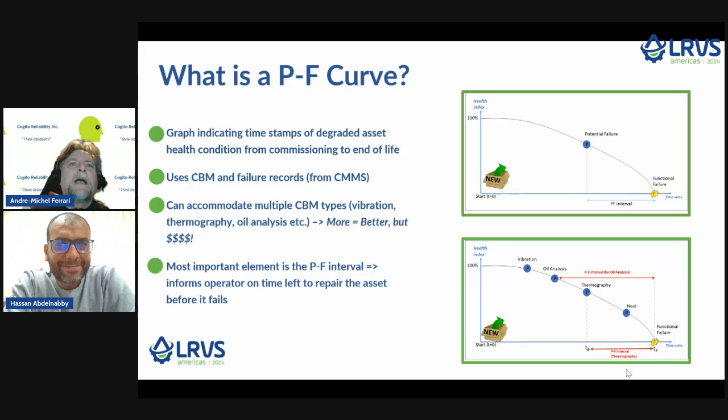So we decided to work with our tissue mill. It's a huge and complex machine. It has three sections. The wire section, the F part, is responsible to form the tissue sheet paper, and the P section is responsible to transfer this sheet to the drying section in the Yankee section, and the last section is the Yankee section. This section is responsible for drying the sheet.

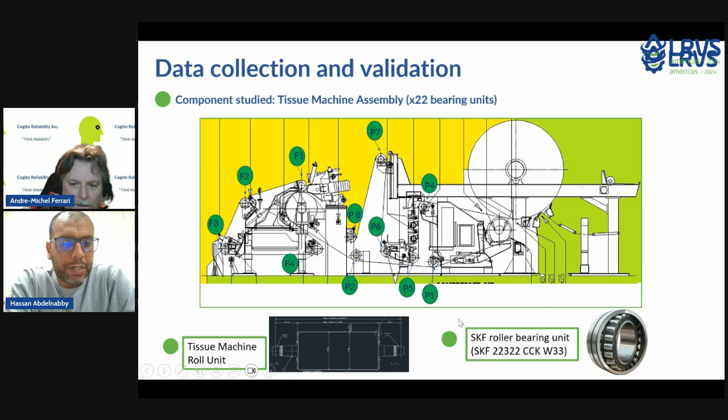In order to make the study as simple as possible, to help us show you how we can build the PF curve, we selected 11 rolls, which have identical bearings in type and size. In this study, we will focus only on the bearing defect. So next slide, please.

In our study, the mill started in 2008. So we tried to gather reliable and valid data. We used our data from the SAP system, which was implemented in our factory in 2015.

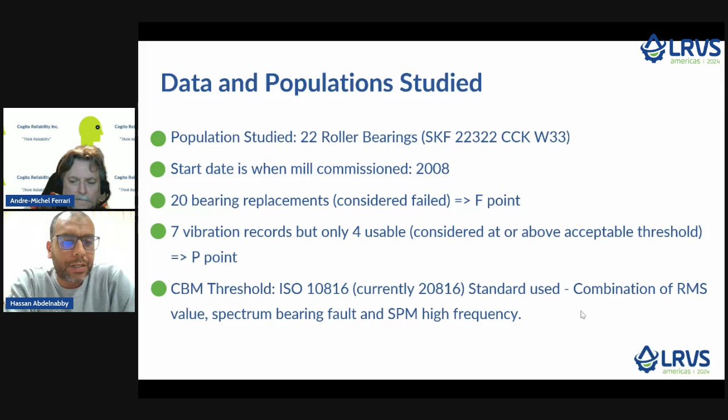We also used the maintenance log in order to get the F point, the failed point, and we used the vibration analysis program in order to come out with 7 vibration records that are used to generate the P point. We only used 4 points because they are considered at or above our acceptable threshold. As for the vibration threshold, we are guided by ISO 10816, currently 20816, and we will talk a little bit more in the next slide. Next slide, please.

So, vibration analysis of the bearing. The bearing has 4 stages. For us, in stages 1 and 2 it is very difficult to see actual damage on the bearing. It's all about subsurface cracks. We only consider these 2 stages in order to make sure that the bearing is already available in our store, or that we are in progress to purchase the bearing. We are focused on stage 3.

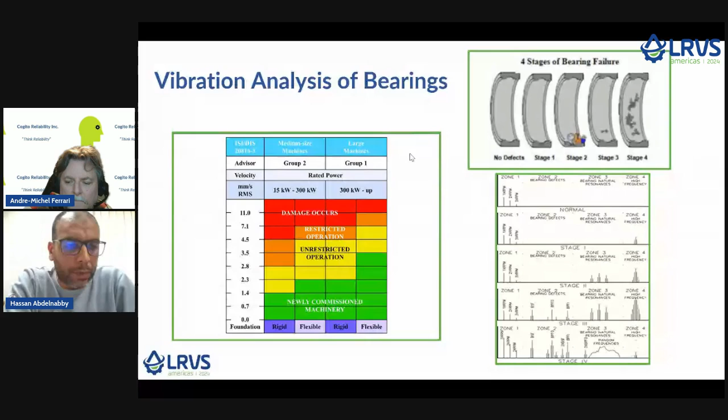In stage 3, you can see actual damage on the bearing, and you need to remove it before it reaches stage 4, because in stage 4 the behavior of the bearing itself can be unpredictable and it can fail anytime. Every stage has its own symptoms, and we follow all of that, and we also monitor the vibration level in order to make sure that it does not exceed the acceptable level of the ISO. So next slide.

So vibration analysis of the bearing. It is a complex process, but I want to make it as short as possible. We monitor the vibration parameters, so acceleration, velocity, or displacement, and see if there is any change in these values. What industry knows is that if it increases 20%, you need to look at it in more depth and detail. So if it increases, we look at the spectrum analysis and time waveform analysis in order to make sure that we find the symptoms of the bearing defect.

All of that can help us build up the baseline and set up the alarm level, which can help us reduce the amount of analysis. And also, if we are in doubt, we compare these values with other similar equipment. All of this is done in order to make sure that when we say the bearing needs to be changed, we are giving the actual judgment. After all, vibration analysis is a condition monitoring technique. So we monitor the condition all the time. So next slide.

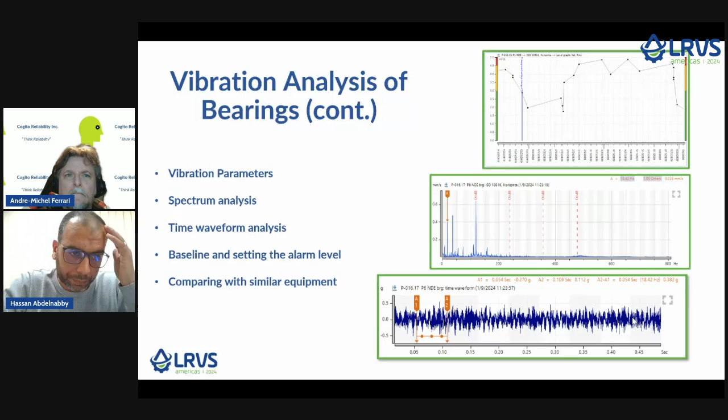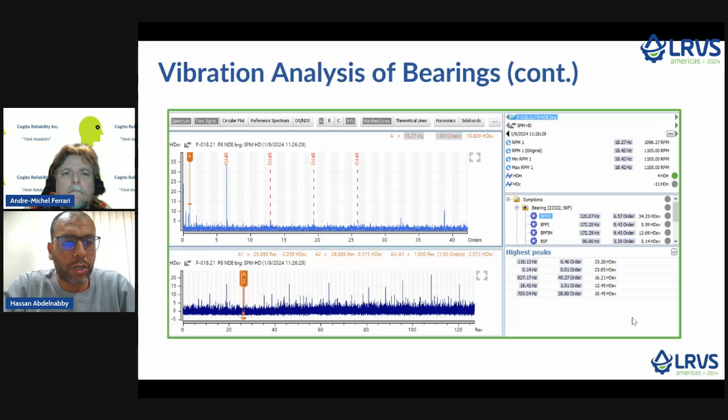So this is an actual image of the software we have, but this is the shock pulse technique. It is another technique that we use in order to give us a pre-warning even before vibration. As you can see, we can detect the bearing failure, and also we can monitor the change in the amount of vibration. We use SPM in order to give us a pre-warning. Maybe a bearing has a long lead time, and we need to start working on it even earlier than the normal PF curve. So back to you, Andre, to start our reliability study.

Okay, thank you, Hassan. Thank you very much. Let's move on to the reliability study we conducted. The PF curve will be built for the population of identical SKF bearings Hassan mentioned earlier. First of all, let's look at the reliability analysis process we use. We get CBM and failure records and calculate the time to failure for each of them, the first graph on the left there.

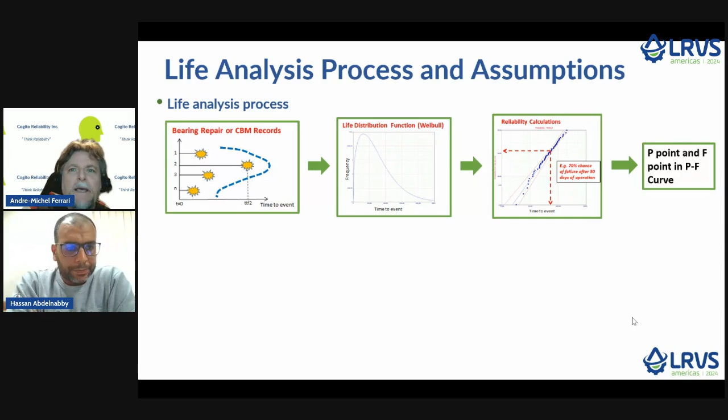Because all the time variables are random, they are best represented by a statistical distribution, in the graph in the middle. So we demonstrate that they follow a Weibull distribution. Once we have defined this distribution, we can do various calculations. I put an example here, such as probability of failure. This process will eventually provide us with the P and F points for the PF curve. The assumptions are all listed below. Assumptions are important to ensure that the study is rigorous and well conducted.

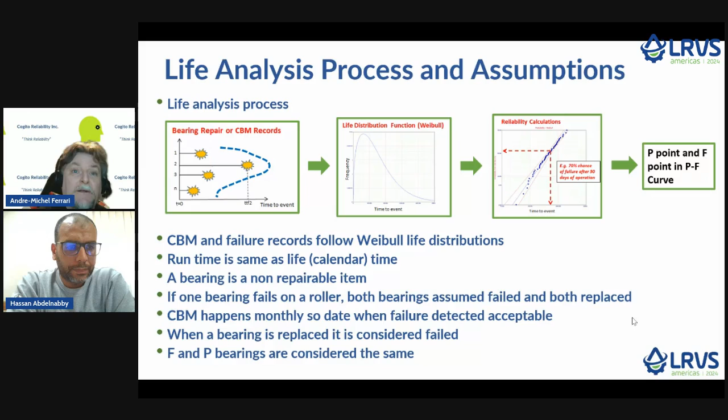So moving on, using this process highlighted earlier, we have literally modeled how a typical SKF bearing in our sample is expected to deteriorate or fail over its lifetime. This slide represents the probability of achieving each point after a specific time interval. So we have two sets of data, P and F. So we have two models shown in this slide.

So we have highlighted in the little box in each graph the Weibull distribution parameters eta and beta, which characterize the distributions for each category. So those parameters are crucial and unique to the model and will help us define the PF point.

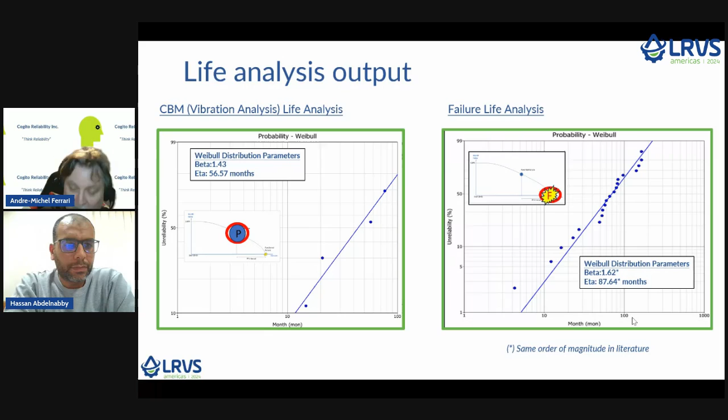Moving on. So finally, here we are. We are ready to build a PF curve. So we use the scale parameter or eta value, which we obtained earlier. This parameter corresponds to the expected time to see a specific condition of failure. Therefore, the expected time to see the first P point, or the point where the high vibration threshold is reached, is around 57 months after the new bearing is installed.

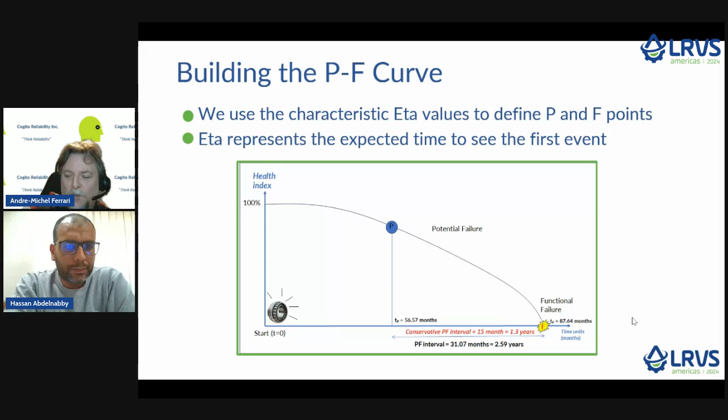The expected time to see the failure point, the F point, is around 88 months after the bearing is installed. So the difference between those 2 points, as shown on the graph, is 31 months or 2.6 years. And this value, 31 months or 2.6 years, is your PF interval.

Moving on. So now let's see how we can interpret the results in a practical way. What does this mean for the person like Hassan who's going to operate and maintain the equipment? What we get from this study is a PF interval. We did not really focus on the vertical axis, which is the health of the equipment. We focus more on the horizontal part, which is essentially the elapsed time or lifetime.

We now know that if we hit the P point, we have 31 months to do something about it before the bearing fails. So in other words, at the P point, the bearing is still functioning, but it is in a degraded state. Nothing has failed. However, we do not want to get to the F point where the machine fails, because if the machine fails, we lose production and revenue.

And in extreme cases, it could be catastrophic with secondary damage. Or the failure could put worker safety at risk. Safety is a value and very important in industry. So therefore, we have 31 months to prevent a failure and plan a repair accordingly.

Just on a side note, in our case, we have limited records, so the model precision is low. For example, for the P point, we use only 4 data points, which is very low. So our confidence boundaries are large. The model is not that precise. We still want to use the model as it's better than having no model at all. But maybe we want to be conservative or careful.

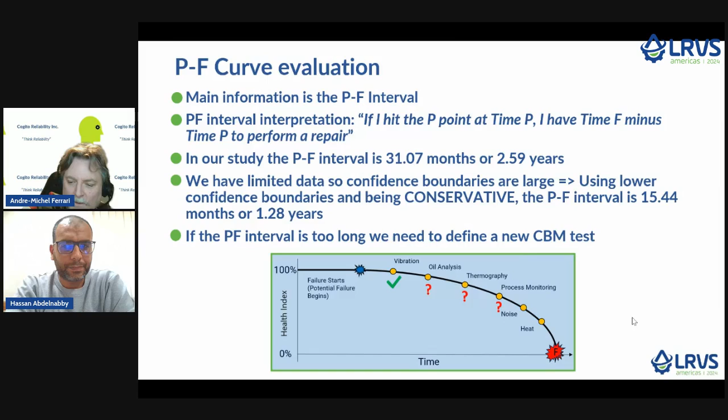This is to find a threshold within our lubricant test results. For example, the appearance of a metallic contaminant that indicates impending degradation. So once we have defined this threshold, we would need to gather all the records and timestamps of those threshold occurrences after each bearing installed. The rest is exactly the same. The F point stays the same unless we have new data about failures and we can refine our model.

If Hassan planned the replacement rather than going towards an unplanned replacement, the planned replacement would cost him only 2,000 US dollars. Hassan does vibration inspection monthly at a cost of one US dollar per bearing per vibration check. So he does it monthly at a cost of $1. So this is low according to North American standard, but this is what it is.

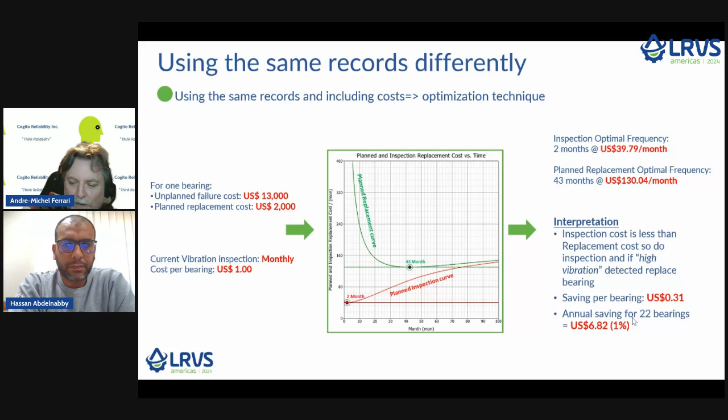So if I take the same concept and look at this methodology again in the context of North America, where prices and costs tend to be higher than Egypt, using the same life statistics, we would have an increase. For example, we have an increase in unplanned failure costs from $13,000 to $25,000. We would have an increase in repair costs to $2,500. And the cost of doing one vibration inspection is significantly higher, from $1 to $50 per bearing.

As before, when we run it through the optimization tool, we find it's cheaper to inspect and replace the bearing if the vibration threshold has been met, rather than doing a planned replacement. The suggested inspection interval is every 5 months, and so we inspect every 5 months, and if we hit the degradation threshold, we have the PF interval time to mitigate.

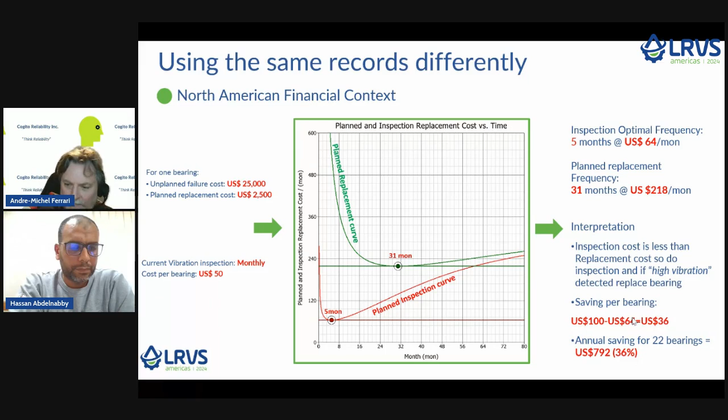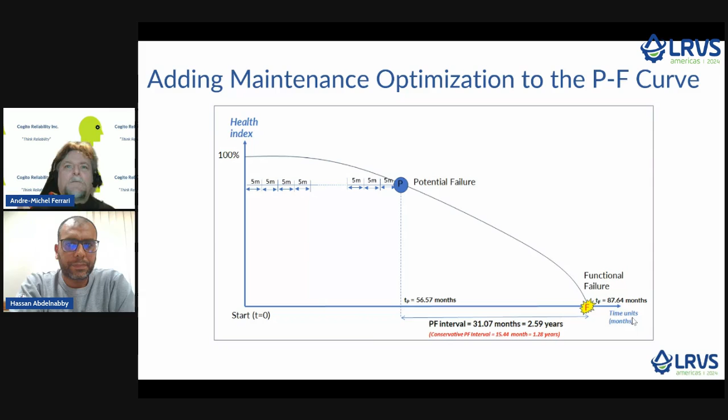So if we use the 5 monthly inspection strategy as suggested here, compared to doing monthly inspection we will be saving $792 per year. So just to conclude here, our PF curve now becomes a bit like a Christmas tree where we are adding decorations to it based on the optimized calculations we did on the previous slides. We now add the recommended inspection schedules. By taking the same data we use to build a PF curve and adding some cost information to it, we are able to refine our maintenance strategy.

So I've talked a lot now, but before I pass the microphone back to Hassan, I'd just like to make some concluding remarks on the reliability study. As shown earlier, the PF curve provides good information, but it's limited to the PF interval. So it would be great to take all the records we used to do the PF curve, and add the cost information to it in order to get an improved maintenance strategy, as we showed earlier.

Just a little teaser here with the information we have. We can even go further and build a reliability block diagram, but that's another presentation for the future. But it shows you how reliability engineering can be versatile, beneficial, and fun. We had lots of fun with Hassan.

So having said that, over to you, Hassan, and thank you so much, Hassan, for working with me on this case study.

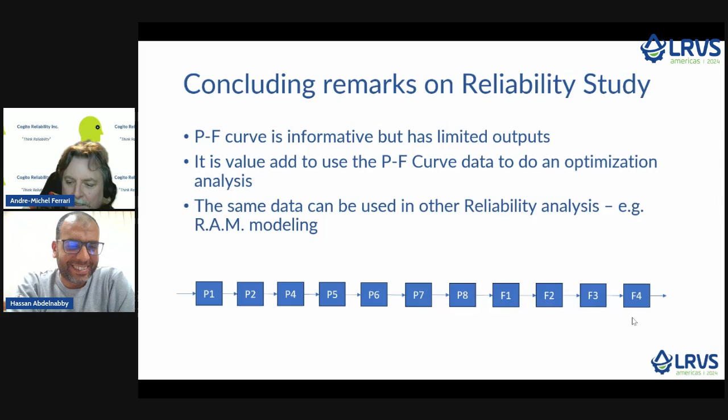Thanks, Andre. So, maintenance engineering review. First of all, you need to monitor your performance. You need to keep records of failure times, mean time between failure, mean time to repair, and machine availability. You need to analyze all of that in order to find the improvement points in your department.

We were able to build our case study because of the availability of data. If we don't have data, we will have nothing, and we will not be able to build anything. So if you are not keeping records of your maintenance log now, start now.

And if you want to find the correct KPIs that you need to monitor, you can ask your peers in the industry, because every industry has its own KPIs. Of course, you can come to consultants who can help you build your KPIs, but you need to monitor your performance. As for the PF curve, our conservative approach was 15 months.

15 months for me as a maintenance engineer is important to have the time to plan the task. You need the time to determine the spare parts needed and whether they're available or not. You need to locate the resources and the manpower needed to perform this task.

So from my point of view, having a long PF interval is essential to have correct behavior in your maintenance, because you want to perform all of that under the safety umbrella. If you have more time, you will plan better, and you'll have a good result at the end of the day. Which brings us to the last remark on this slide.

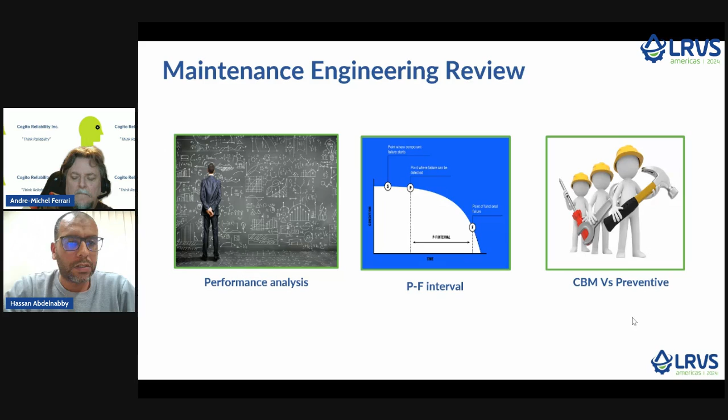Following condition monitoring techniques like vibration, ultrasound, or any other condition monitoring techniques can help you save a lot of time and money. So next slide, please, Andre. This is our final slide.

If you want to start, there is an easy way to start your journey in reliability. It can begin by creating your critical asset list, and then you can look for bad actors, equipment that causes you the most pain in cost or downtime. If you integrate both of them, you will find the critical assets that need your attention. You need to work on these assets in order to decrease the downtime of the whole plant,

not only the critical assets themselves. If you select the optimum CBM tool for these assets and find a suitable way to maintain them, you will end up increasing the performance of your assets. So you need to analyze this performance and your maintenance activity performance. At the end of the day, you need to learn from your mistakes and adjust.

And also, if you are working okay and you can see that your results are fulfilling your KPIs, you need to make it a standard way to work in the whole plant, not only the critical assets.

So finally, I just want to thank Andre. It was a pleasure to work with you, my friend, and I hope we continue working together. Yeah, so thank you, Hassan.

Thank you both, Hassan and Andre, for that awesome presentation on the PF curve. I just want to make sure we've got some time for questions. Andre, we've got Med, who's asking which condition-based monitoring tests do you prefer between vibration and lubrication or others? And what's the cost difference between them?